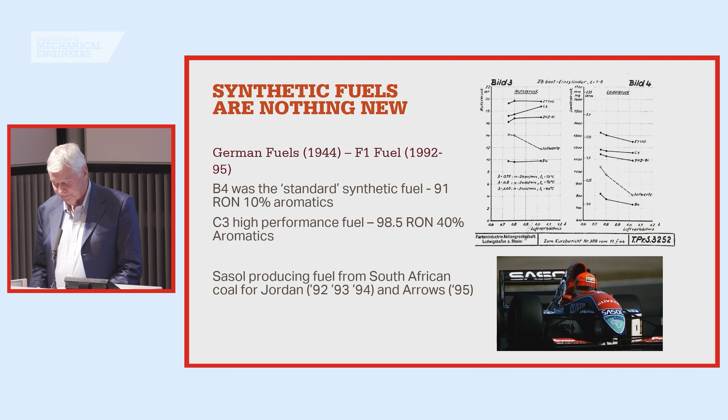Our journey, however, started with a different agenda. I joined Formula One, the commercial rights holder of the sport, in 2017. We examined many aspects that Formula One needed for a healthy future. One of these was sustainability, and I suggested that we could both enhance our image and make a real contribution to society if we developed and used sustainable fuels in Formula One.

As a mechanical engineer, I needed to revise and extend my school chemistry, but the more I got into the subject, the more I realised that this could be a viable parallel path to light vehicle electrification. So in 2018, we put together these high-level objectives for a sustainable fuel project.

Fortuitously, to the end of 2018, we started talking to Aramco about a future partnership, and this actually came about in 2019 and helped greatly with our project. So let's look at these 5 objectives individually.

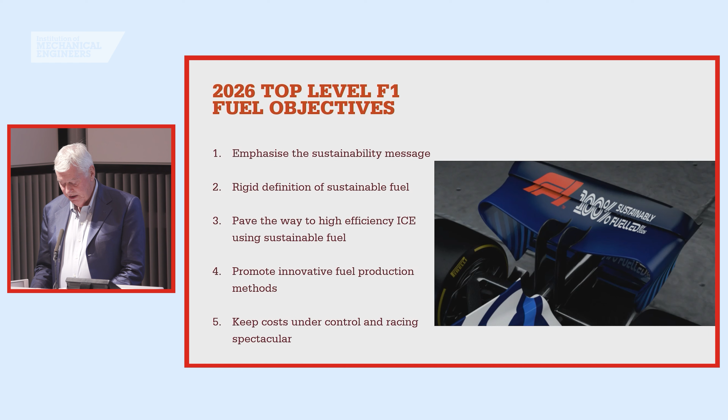We wanted to emphasise the sustainability message, and by this time people were starting to talk about sustainable fuels in motorsport. I think that when I started, very few people understood exactly what a sustainable fuel was, and I'd probably include myself in that. There was a lot of confusion, a lot of different terminology, and certainly there was some bad press about early generation biofuels.

I was determined that if we were going to introduce sustainable fuels into Formula One, we had to do it correctly. That meant having full traceability and, of course, an available supply of sustainable molecules from which to synthesize the fuel. Early on, we could see that this was going to be difficult, and indeed now, when we're just over a year away from racing the fuel, there's still not an abundant supply.

This was yet another reason not to rush into an early introduction of a product that would not stand up to scrutiny, and led us to conclude that an introduction in 2026 with a new power unit was the best way forward.

In order to avoid accusations of greenwashing, it was important that our fuel really stretched the boundaries of possibility when it came to making a truly sustainable fuel.

For this reason, I was adamant that we didn't introduce shortcuts like co-processing, which, even if it might ultimately be a good route to volume production, did not really push the oil companies to show the true potential of maximum carbon reduction. Even when it came to the denaturing of the ethanol in the fuel, I was insistent this was done in a sustainable method, much to the chagrin but the ultimate acceptance of the oil companies.

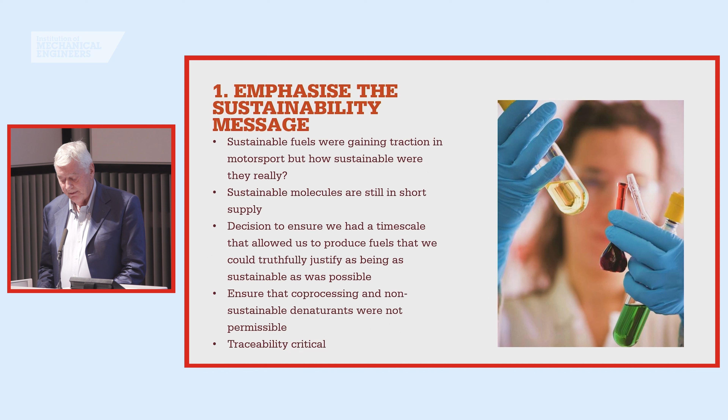With the confusing semantics surrounding the defining of non-fossil fuels, it was really important that we had a rigid definition of what we meant by sustainable fuel, and this slide shows where we ended up. Now, I don't expect you to read all 229 words of it, but it is available on the FIA website as part of the 2026 technical regulations.

The regulations are intended to ensure that the fuel comprises solely of advanced sustainable components, and that they in turn are composed of certified compounds and refinery streams. The final blended fuel must achieve a greenhouse gas emission saving relative to fossil-derived fuels of at least that defined in the transport sector of the EU Renewable Energy Directive.

In practice, we expect the GHG savings to be much greater than this. The GHG saving calculation takes into account any net carbon emissions from land use change, the energy used in harvesting and transporting the biomass, and the production and processing of the advanced sustainable component. In any process where sustainable energy is used, this must be surplus to local domestic requirements.

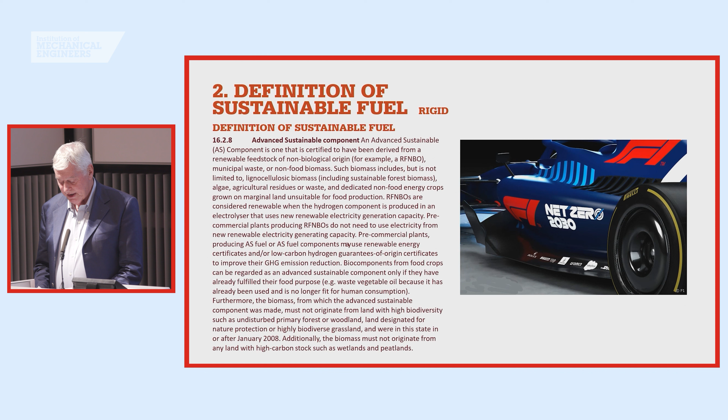I think we did a pretty good job, and I think in 2026 we can say with our hand on our hearts that the fuel in use in Formula One is as sustainable as the technology and the supply chain will allow.

Our third objective is interesting in that it's the one aspect where we changed direction after the project started. Initially, I was very keen to show what could be done with a synthetic fuel if we co-optimised the fuel and the engine together. This would open many possibilities, not least of which would be extreme compression ratios and cylinder pressures with high attendant thermal efficiencies.

As you'll know, even with a sophisticated combustion system on the current Formula One engines, performance is limited by knock. I felt we could lift this limitation significantly through a co-optimization process. After all, if you're going to synthesize a fuel with an open toolbox of molecular components, there's no need to just copy fossil-based fuels. However, as the project progressed and we involved the fuel companies more and more, and indeed our communications people in Formula One, it became apparent that demonstrating the use of a synthesized drop-in fuel would be much more useful, and at this stage, a better message.

We therefore decided that the 2026 Formula One fuel should be an EN228 type fuel, equally capable of running in a Formula One engine or any one of the 1.4 billion internal combustion engine cars there will be on the road by 2030.

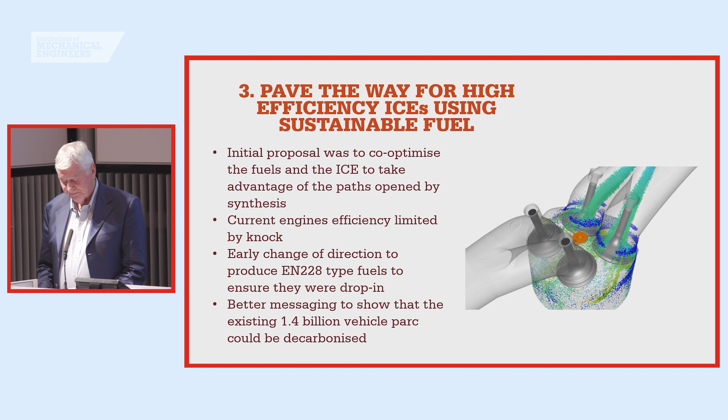Our fourth objective was to ensure that we didn't limit the technology used to make the fuel. I was very aware that European governments had dictated that the solution to CO2 reduction mandated the adoption of electric vehicles, rather than seeking the opinion of those who may have proposed alternative or at least parallel solutions. It was important that we didn't make the same mistake, and in fact encourage competition to produce a closely specified final product in the most efficient way possible.

You'll have seen many diagrams like the one before you showing the many paths to the various forms of energy carriers. Even this simple diagram can have many subsets, and between ourselves and the FIA we produced a diagram much more complex than the one on the screen, and then tried hard to ensure that we hadn't unintentionally closed off any promising path. While it's difficult to quote as an efficiency, nature is really great, even if somewhat slow, at taking CO2 out of the air, taking the carbon to grow a plant and releasing the oxygen.

If you look at the history of synthetic fuel production, you see many different efficiencies quoted in terms of EROI, or energy return on investment, from 62% for direct liquefaction of coal to 42% for biomass to liquid. ExxonMobil quote greater than 80% for fossil gasoline. If we're ever to approach this figure, we need not just an abundance of surplus renewable electricity, but also, and very importantly, the freedom of process to find the best solution.

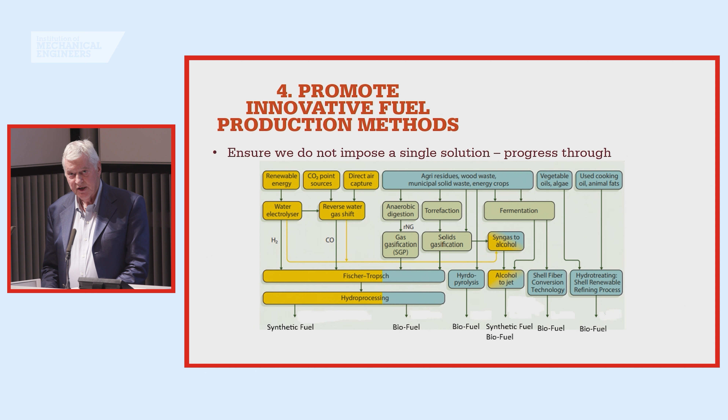Now, much of what we talked about so far is philanthropic, but we must never forget that the mission statement of Formula One is to produce the greatest racing spectacle on the planet. We couldn't afford for the introduction of the new fuel to raise costs by a prohibitive amount, or more importantly, to allow one supplier and engine manufacturer to gain the dominant position, thereby ruining the concept of close racing.

The cost question was difficult, as Formula One fuels are already blended in laboratory conditions, and they are therefore relatively costly. But the introduction of sustainable fuels had the potential to increase those costs significantly in the short term. One mitigation was to increase the oxygen limit in the fuel to around 7% by weight, which is roughly equivalent to E20. The fact that 20% of the volume of the fuel could now be a relatively cheap component, like ethanol, would assist in controlling the final price.

The current cost of a barrel, which is 159 litres, of Brent crude is $70. Once that's refined, it equates to around $99 for a barrel of gasoline. Aramco estimate the current cost of a barrel of synthetic gasoline, made using carbon capture technology, is around $250 a barrel, so there's still some way to go.

The need to keep the racing competitive and not detract from all that we achieved from the 2022 regulations required a more innovative approach. In fact, one as radical as the original mass flow limit that was introduced in 2014.

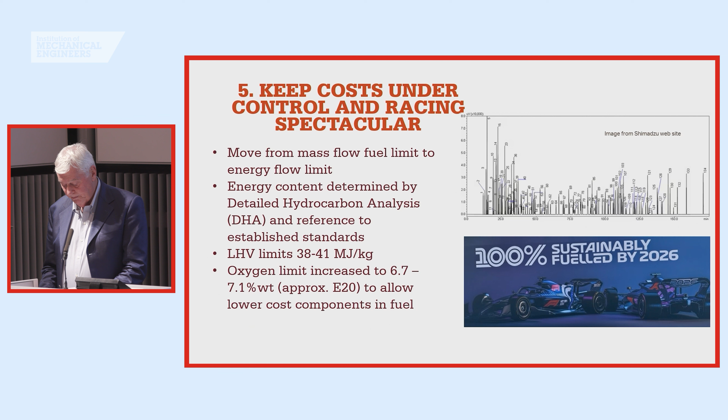So I hope this brief introduction to the thinking behind the 2026 Formula One fuel will have shown you that this is a very serious project that I and my colleagues truly believe in. We've been acutely aware that we may be accused of greenwashing, and therefore our approach has been rigorous. I also truly believe that by bringing to public attention the fact that internal combustion engines can run on fuels that ultimately could add no or at least minimal CO2 to the atmosphere provides a pragmatic approach to retaining the freedom that personal mobility gives us while limiting the damage to the planet.

So I'll now hand you over to Paddy, who will discuss the process by which his company is producing a very impressive sustainable fuel.

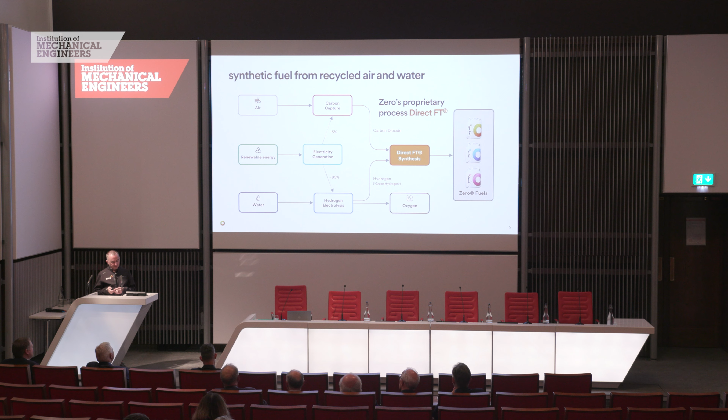Just a reminder, what is a synthetic fuel? This is how we would draw the recipe, but effectively, if we start from the bottom, we're making green hydrogen from water using renewable electricity. So you'll have heard of green hydrogen. Actually, the vast bulk of the energy is going into that hydrogen, so it has to be renewable, can be of any type.

The molecule then, hydrogen, we call that the energy molecule, and what it lacks is utility. Hydrogen, very, very difficult material. Interestingly, it doesn't exist in biology in its raw form, so I think there's some significance in that. It's a very, very dangerous and low-density gas.

But a great energy carrier. And when we bring in carbon on the top row, we turn that molecule into something that we can store and pipe and deliver, and it has very high density. The only energy format that has a higher density than that, really, that's around us would be uranium for nuclear fission. So we're in a really good spot. And again, we see that in biology with all the hydrocarbons that are in use in plants and animals.

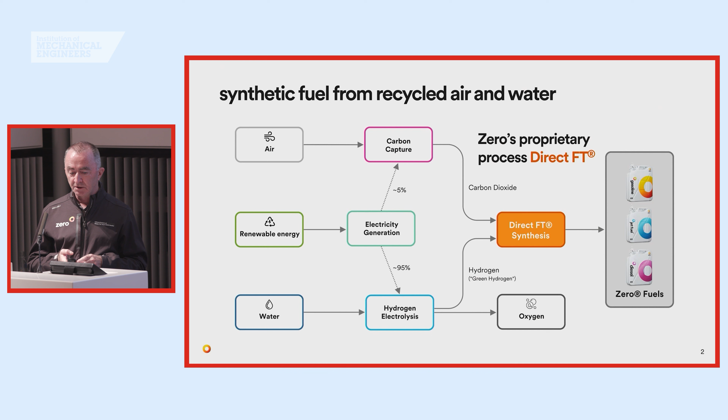And what we do is bring that together in the synthesis. In our case with Zero, our particular version of Fischer-Tropsch, which Pat mentioned is 100 years old, we call direct Fischer-Tropsch. The reason essentially is that we are able to make a refinery grade fuel directly from our process. We don't have to go via any further downstream refining or blending process. So we can make directly a gasoline or a jet fuel or a diesel according to our choice - a refinery grade set of molecules.

And just a reminder, what are the real points of synthetic fuels? I will distinguish here from a biofuel. Biofuel comes effectively from agricultural feedstocks - it's an agricultural product, whether it's direct, like a sugar making alcohol in Brazil for many, many years, or a second generation, as is dictated in the Formula One regulations, which comes from the waste of a crop. Nevertheless, it's a limited feedstock and not one which will get cheaper.

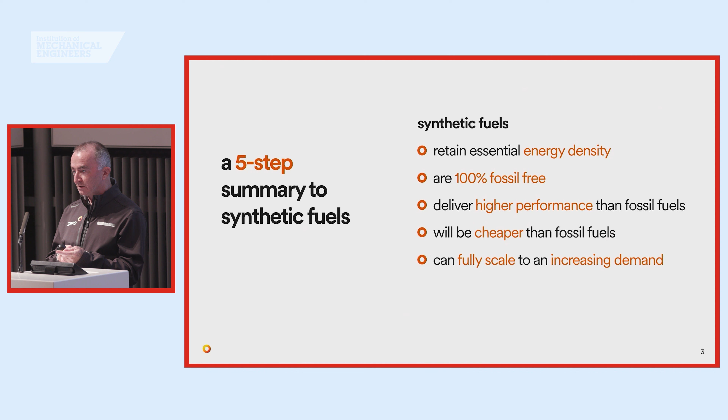So we look here at where a synthetic comes in, which is an entirely industrially made fuel. If you look at the recipe before, all of that is machinery. There is no feedstock other than air and water, which are around in the immediate environment. So we keep the energy density of the regular hydrocarbons. We're 100% fossil-free. We can eventually make fuels, in fact we already do, that are better than the fossil equivalents. They will be cheaper, and I'll come on to that. And they can scale to all necessary demand within our current industrial civilization.

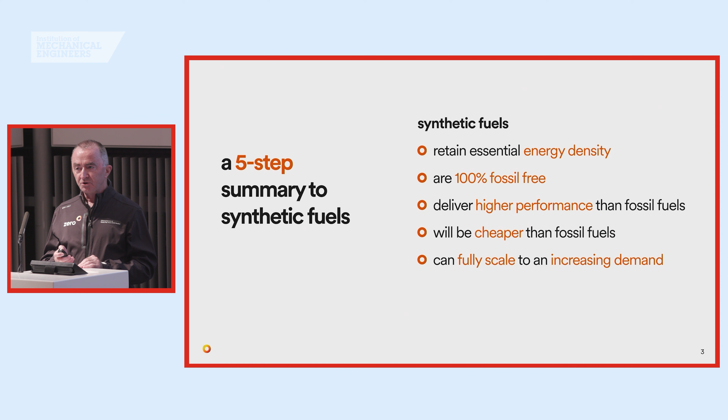So these are all critical components of synthetic fuels, and why we believe in Zero, this is the future to transform our entire industrial society.

Just a quick point on energy density. We have a lot of talk about electrification and how great electric cars are. I do like electric cars, by the way, but energy density is a very, very critical parameter, particularly in mobility. Aircraft being the most obvious example, but even if you go to marine, shipping, and anything in between - density is a killer if it's low. You're effectively taking profit because you're taking payload.

And that may be less true of your personal transport, but it's true in almost all other vehicles. And the number there, a lithium battery would be 50 times lower energy density than an equivalent hydrocarbon liquid. And hydrogen sits somewhere in the middle, depending on the containment, but it will be at least 5 times heavier. And volume is another factor, by the way, not even mentioned, but again, very relevant in an aircraft, for instance.

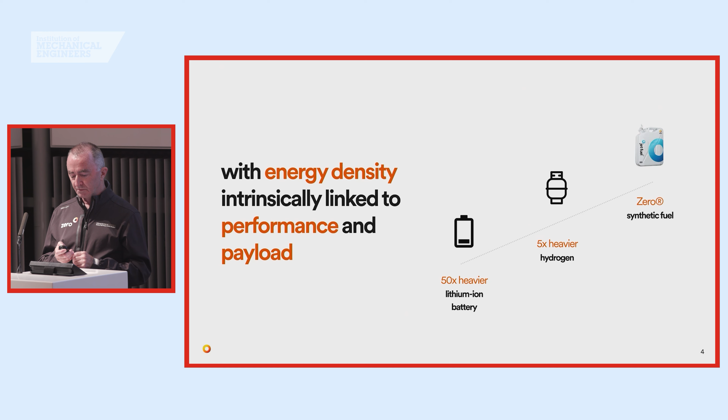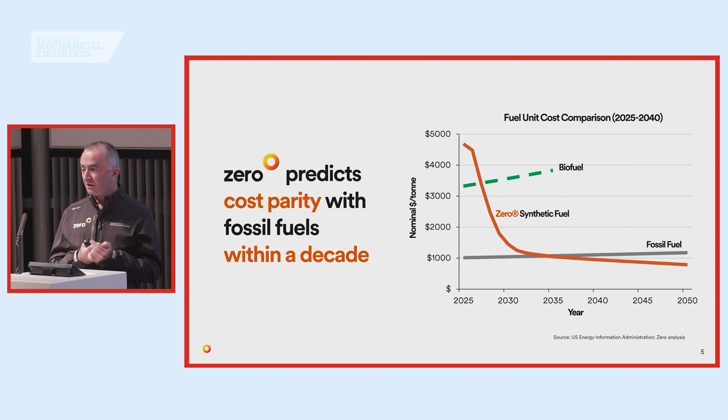The cheapest power station you can build in most parts of the world now will be a solar or wind generation station, not a fossil fuel station. So we predict to get parity inside 10 years, and we think that will be a real game changer in all manner of effects.

Honestly, I believe in 10, 20 years we'll face the choice, just like we've seen in wind and solar. Do I go and explore for new oil in a new offshore license? It will be 30 years before I monetize that oil, during which I'm sinking huge capital into a pit. Or will I go and build a synthetic fuel plant where I know I can have the fuel inside 2 years and it will be cheaper and better? I think that's a clear choice.

And that is where the world will move. I hope you may recall me saying that when it comes to pass. So we think it's a really exciting point.

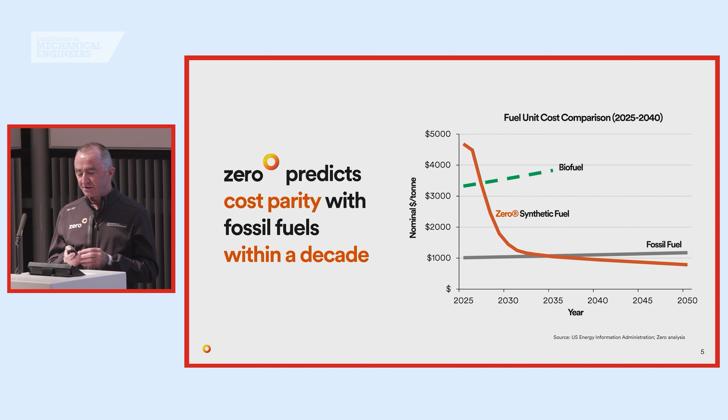And the last point is around scale. I know somebody already asked me that downstairs. If you want some simple numbers: 6% of Australia's land area, which is far less than the degree that is uninhabitable, as a solar farm, would make all the fossil fuel we use today on Earth as synthetic. So that just gives you an idea. It's a big amount of land, a big solar farm, but that's absolutely viable.

And we won't see a reduction in the need for liquid fuels. We will see an increase. More people want to fly, more people want a higher standard of living, and they're going to get it. We just need to do it properly. So it is actually a capital challenge, this. We know how to do it. We just have to go and invest and build it.

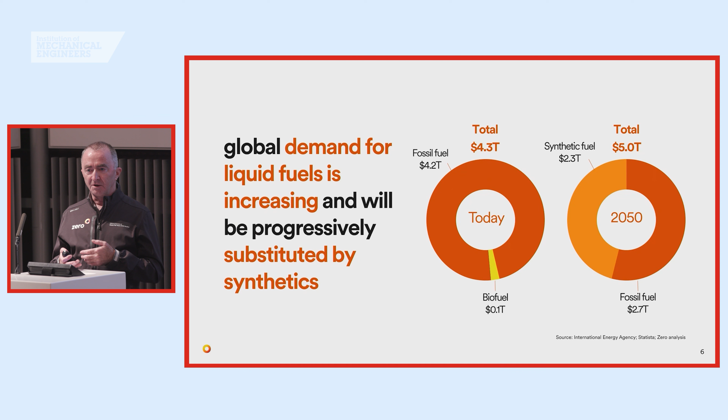We effectively have to replace the entire upstream of the oil industry with synthetic plant.

Just a quick one, what do we do at Zero? We're Formula One people, actually. We have a very Formula One mindset about how we develop. So it's not just me, there are about 20%, we're 60 people now, 20% of us come from Formula One. So we bring that spirit to what we're doing.

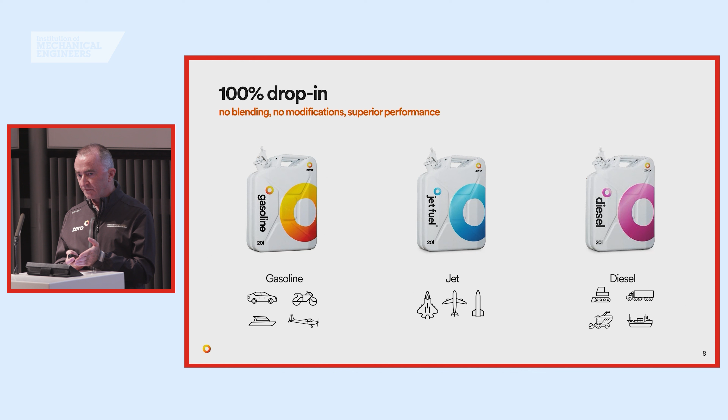We make, as I said, drop-in versions of the 3 major fuels, very high quality. To give the gasoline example, we ran just 2 weeks ago a back-to-back on a dynamometer of an EN228 gasoline at RON 98, comparing to a standard RON 98 ethanol-free, which is actually an Australian grade. And we had more power on the dyno without any adjustment whatsoever. So that's the standard of gasoline we've reached straight out of our process without any blending or downstream processing.

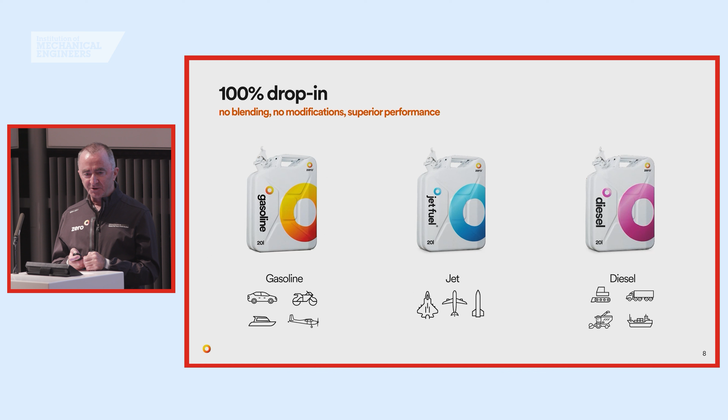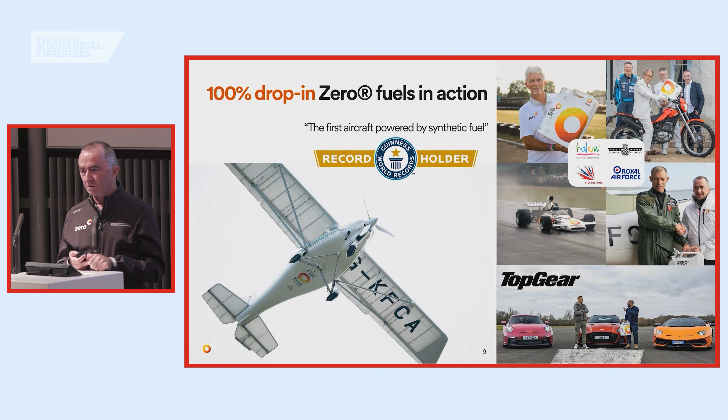We can also make a replica of Jet A1, which is a very sought-after set of molecules. Most of the sustainable aviation fuels that you see will only reach a 50% blend limit because they don't have the right molecules. And we've run lots of engines. I'm not going to go through all of them, but I think most interesting, we ran that McLaren, Cosworth-powered, in the historic sessions at the British Grand Prix on our gasoline, straight drop-in. Worked perfectly.

This is just showing our technology. I'm not going to delve into the detail, but essentially the point is that we can make jet, diesel, or gasoline with effectively the same equipment. So it gives us tremendous flexibility.

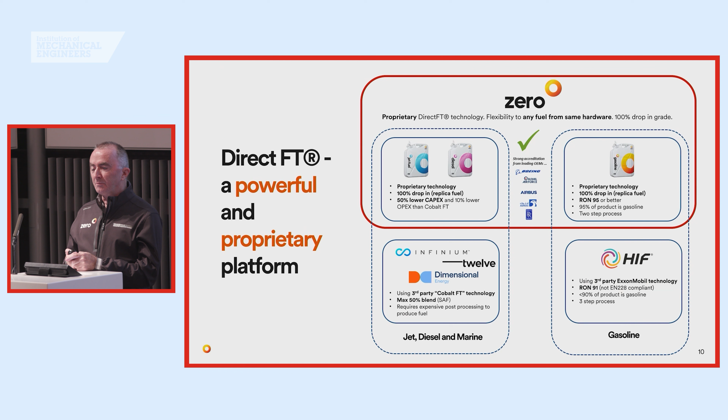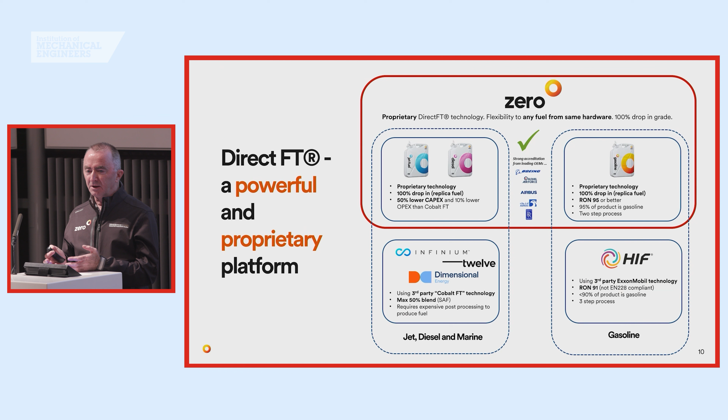And I think if I go into the gasoline, we're very proud of the platform in the sense of being able to make not only, say, an EN228 replica, but also some of the fuels that Pat talked about, these high-performance fuels, let's call them designer gasolines. So the future of chemistry in this sector is incredibly exciting because these are completely designed fuels. Every molecule is designed. We're not dealing with what we happen to dig up from underground. Fully engineered fuels.

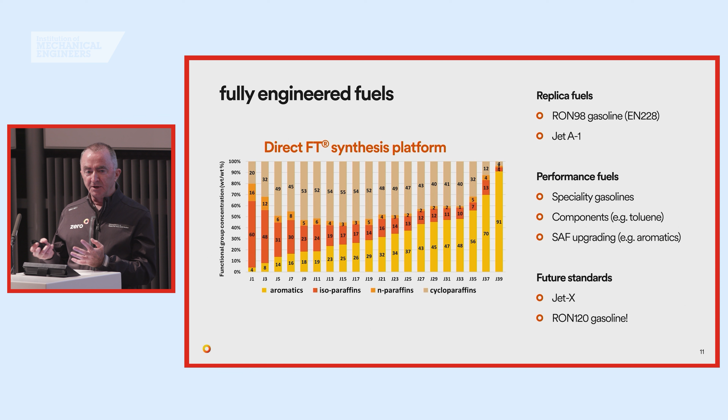I'll just give an example there. Shown across, these are the range of the 4 primary molecules within a gasoline, for instance: the paraffins, isoparaffins, these are chains or chains with branches, and then we move into circles with cycloparaffins, and then the unsaturated aromatics, which are based on, like, a benzene or onwards. And with our process, we can make all these different mixes between the two, which really emphasizes the point I was making around the tailoring that's possible with chemistry.

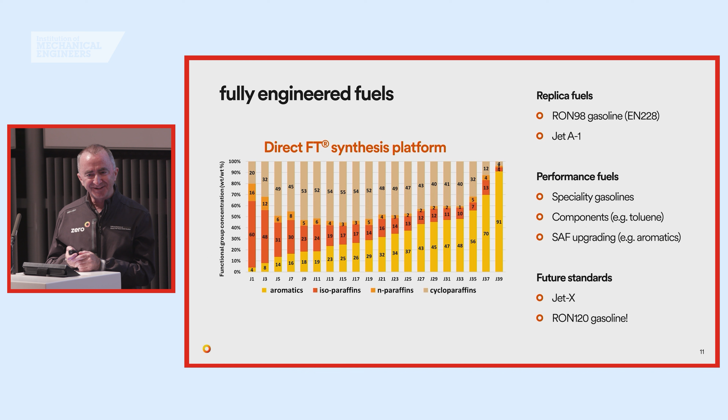Effectively, we're gluing hydrogen and carbon together in any way we wish, and that's a tremendously powerful and exciting opportunity, particularly as we move into the subject of motor racing, which is where we're headed. I've given you a lot of background there. I need to bring it back to motor racing, and I'll do that in a minute.

But just showing where we are, we're currently making 3 litres a day in our plant in Bicester, not the shopping end of town.

We'll be moving to about 40 litres a day in about 4 or 5 months within our building, then we start moving outside the building up to 500 litres a day in the second quarter of next year, and onwards from there to eventually very, very large scales. So that's our journey at the moment.

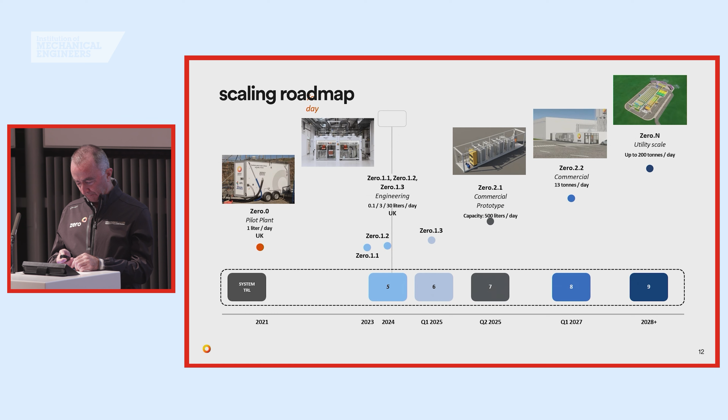This is where we're at today. The main picture in the middle is our currently running line, or train, as we call it—the 3 litre a day train—and we'll be building towards the camera the larger 30-40 litre plant. We've made the place look very attractive because we see this as a showcase for this exciting new space.

One of our team was down at Brooklands today talking. I think they said there were several hundred kids. This was organised by the RAF to introduce them to this subject, and it was, they said, incredibly exciting how excited the kids were about this sort of notion.

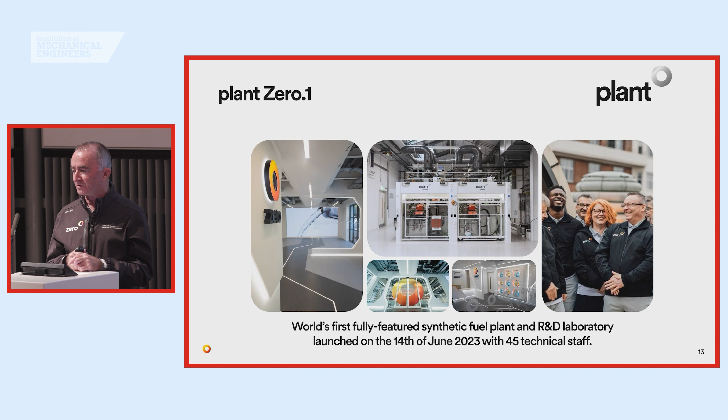We find that we feel like evangelists because most people we meet have never heard of synthetic fuels. They have no idea you can make fuel rather than only dig it up out of the ground.

So my last two slides, I hope I'm not squeezing Hal too much. Just, how do we bootstrap this industry? Because like anything new, initial cost is a challenge.

In aviation, we get great political support. Aviation is the bad guy in the world. Everybody should stop flying, apparently. It's a sin. Obviously they won't, but it does mean it gets a lot of political support around moving into sustainable fuels.

Interestingly, there is great recognition now in aviation that eSAF, which is technically what we call an electrically generated sustainable aviation fuel—that is to say, a synthetic—is the pathway to scale and to low cost. That is now recognised. A year ago, it wasn't.

A year before that, they wanted to build hydrogen aircraft. A year before that, they wanted to build electric aeroplanes. They've finally started to understand, which is really great news, that this is the answer.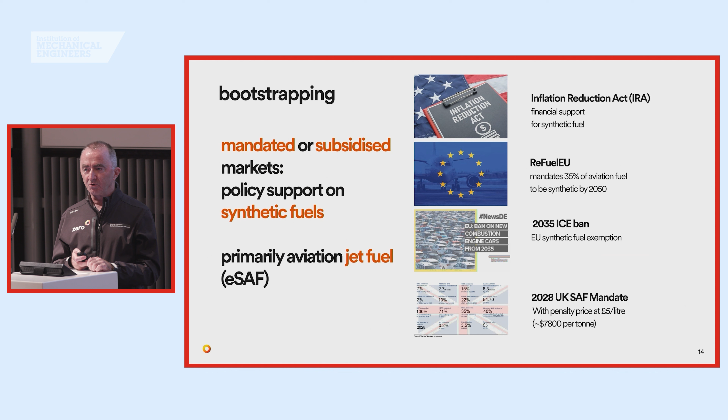Governments are now providing very strong subsidies. The UK are mandating synthetic aviation fuel from 2028, as a small blend, but with tremendous price support. So that's a really good manoeuvre. And we see the same across all of Europe—that's good for aviation fuel.

In terms of gasoline, it's slightly more difficult because you're supposed to electrify all your cars according to government. So they're not really giving much price support or mandates. So we're relying a lot more on voluntary markets—people who will be willing to pay more to do the right thing.

That can be corporations as well as individuals, so high net worths with their expensive cars, or, as an example, Formula One or other motor racing series, or events with classic cars and so on. We're seeing that's where the initial support will come in terms of premiums—people who are less price sensitive than what you'd expect on the regular forecourt.

This will be a tremendously important market, and that's why we're so keen to work in motorsport, which hooks me back into why we're here this evening. Motorsport will be a critical component of bringing this technology into circulation, bootstrapping us onto that cost curve where we'll adopt it and bring it towards widespread use and eventually cost equivalence with fossil fuels. That journey will start in motorsport, even perhaps earlier than aviation.

Hello, everyone. It's an absolute privilege to be here, and a wonderful thing to be speaking after these two great engineers, motorsports legends, these guys, and somehow I've managed to find my way up the stage after them. So that doesn't sound like me, what was just described.

I think I am most proud, actually, that I've been at Mercedes for 20 years, and I am still at heart an oily power unit engineer. Loved being part of that. Those early days of trying to get V10s and V8s to run at 20,000 RPM and keep the valve train together. That was great fun. Anyway, it's a privilege to be here. Won't go on too much about that stuff.

Let's talk about sustainable fuels. That's our factory. Grown a lot over the years, and we've developed a lot since 2004 when I joined, and we were then an engine company called High Performance Engines at various times, but it's truly a power unit company now. A lot more electrification, battery packs, motors, power electronics, and I think this journey in sustainable fuel is another obvious step for us to take in developing something that really can make a difference to the world.

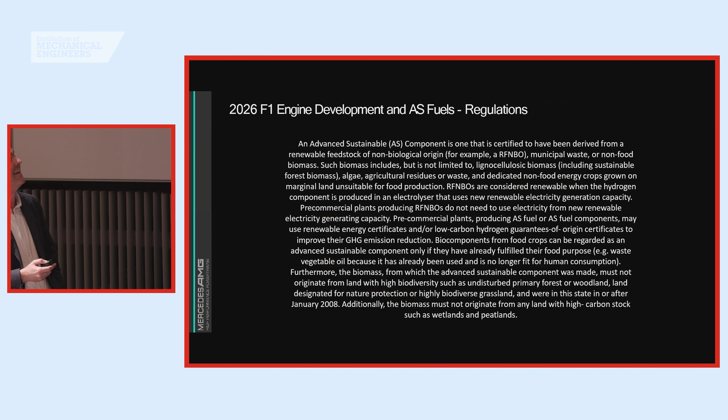Here's the same wording that got put up earlier. How many words did you say there were? Too many.

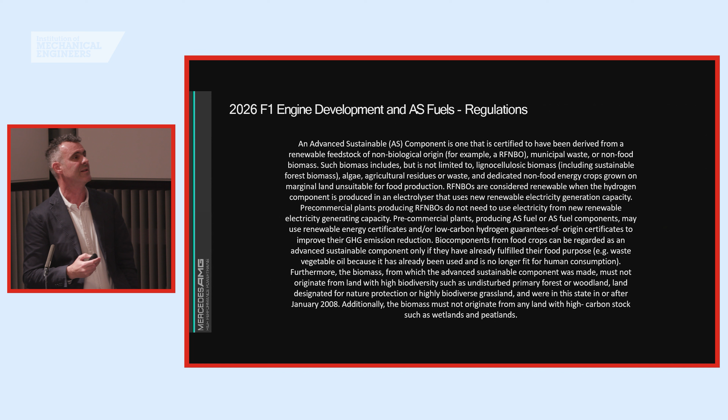The very start of the 2026 project, it was always going to be about 100% sustainable fuel, as you said. It was one of the key aspects. And as has been said by others previously, I didn't know what sustainable fuel was. Didn't have a clue.

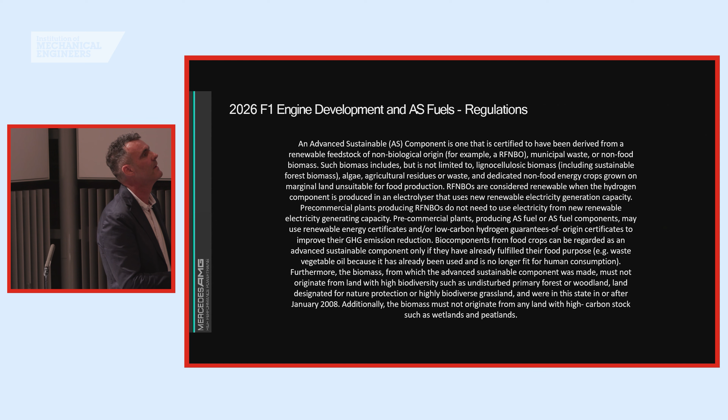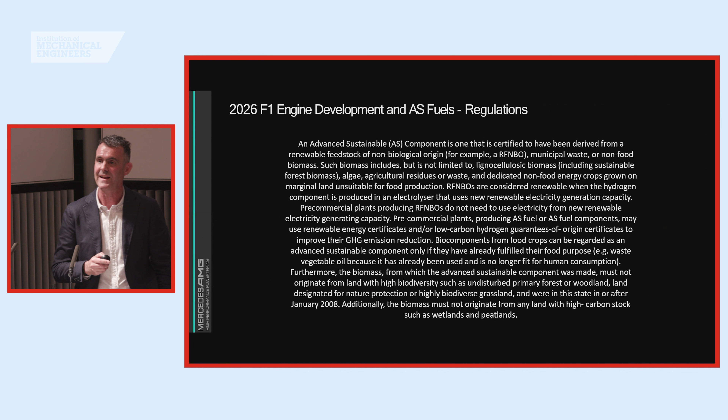Fortunately, this has been put together. Unlike previously, go on, read it. It's a long piece of wording, but it has to be. It's very clear, and actually, what Pat said is absolutely true. Formula One engineers, most engineers really, if you give them a regulation, the first thing they try and find is a loophole. They're Harry Houdinis, and we've got some of the best. So we absolutely have to have a very clear definition, otherwise we'll be trampling all over it, and I think that one's pretty decent.

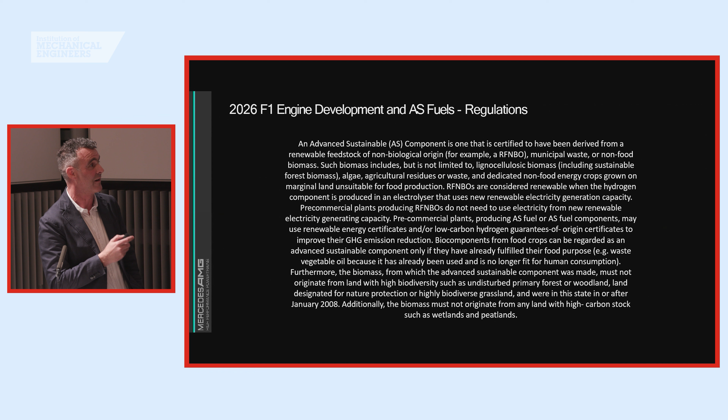But when people ask me what does it really mean, I go for that: no dinosaurs have been hurt in the making of this fuel, and that does it for most people. They kind of understand what we mean then. But I think what was also done with the regulations - I feel like I'm tipping my hat too often in this direction - it wasn't about saying what we had to do. It wasn't saying it had to be an e-fuel. It wasn't saying it had to be a biomass fuel. There was a lot of, although that wording is quite a lot of words, there's a lot of different ways you can go about it. And I think that's pretty canny, because it's like you say, it's about the outcome. The outcome's no dinosaurs get hurt. But actually, it gave us the option and different ways of approaching the problem.

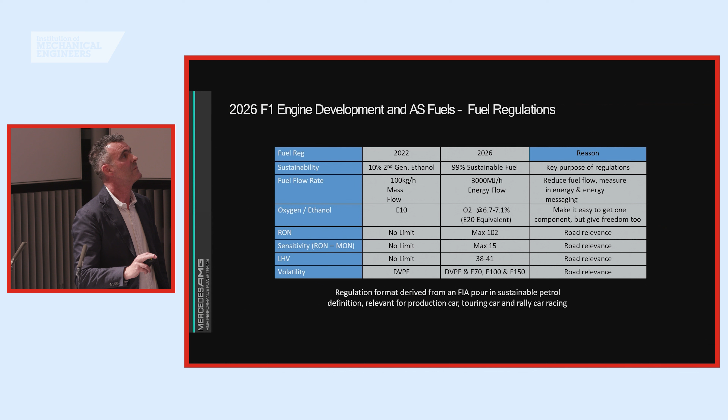The energy flow that was mentioned earlier, we're transferring to that, and the E10 becoming probably an E20. You can use different oxygen if you want, but probably an E20. And as we said earlier, it makes it easy to get one of the components, basically, and cuts down the costs. But it still gave us some freedom, because it could have just been an E20. And then we look at some of the other specifications of the fuel that we just didn't have previously in F1. So there's a maximum RON limit, there's a sensitivity limit, there's an LHV limit, and the volatility is far more tied down.

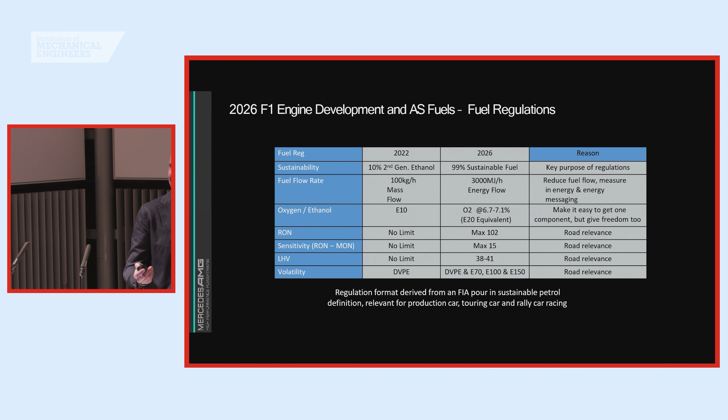What that was all about is road relevance. The regulation format was derived from an FIA pour in sustainable petrol, so really it should be a sustainable pour in petrol. The RON is a bit high, and the ethanol is probably a bit more than you'd have, but they're all completely doable things to get it into something you can just pour in. So that's where we got to with the regulations.

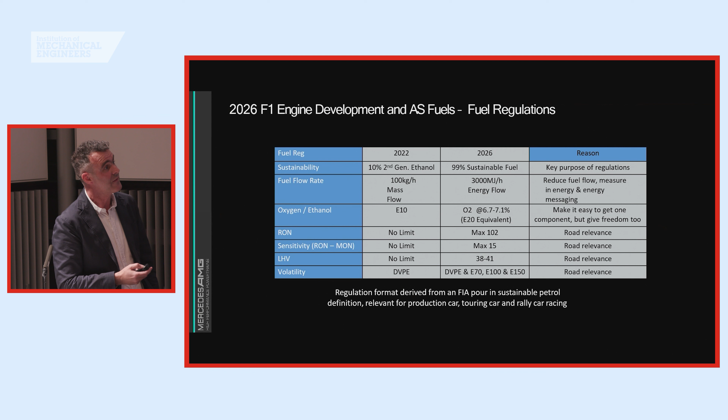As I said, I'm only a power unit manufacturer, not a fuel producer. What we're trying to do is make a power unit with the most performance. That means we need to think about the fuel we're creating with our partner, in our case Petronas, in complete combination with what the power unit's going to do, and what the regulations are for the power unit. So we couldn't really develop the power unit, or the fuel, without real thought about the other combustion parameters in the engine.

There's quite a number of them that have changed. As has been said previously, there's a reduction in the amount of fuel being run, about 75%, something like that. That's a regulation fundamental. The compression ratio is going down - not something we're particular fans of, I must admit, but there we are. That's about road relevance and simplification.

One of the big things about the new regulations was we wanted to get some new players into the sport, which was successfully done, but they were very keen on making sure the compression ratio was a sensible number, more in line with road cars.

We've got a boost pressure limit imposed upon us. I've got a pound bet - no, a pint, it's a pint, isn't it - I've got a pint of beer bet. Pat doesn't think we'll get anywhere near it. I'm not so sure, but we'll have to see where we get to in that first race.

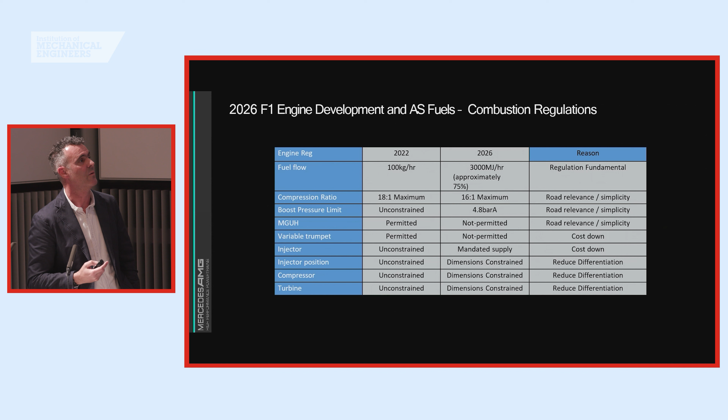So that's the fuel regulations and the combustion engine regulations, particularly the combustion part of the regulations we're working with, and we need to make that fuel and the PU sing together.

Here's some fuel basics. I worry about this next couple of slides because I'm no fuel person, but if I look at the difference between pump fuel and F1 fuel, I think the main basis of pump fuel is the cost. That's what people are talking about, that's what people are working on. There's a lot of constraint on it - volatility, RON, sensitivity - the sort of things we've now added to the '26 fuel. But basically, the cheaper you can make it, the less refined you can make it, the better it is. That's why you end up with a fuel that has probably got greater than 150 components in it.

If I look at current F1 fuels, and this is the current situation I've got on this slide, it's all about performance. We don't really care about the cost.

We know from long experience what components within a fuel the combustion engine likes, what it enjoys burning and what it doesn't. Because cost isn't really a limitation, all we want in the fuel are things the combustion engine loves burning. We don't want any passengers, especially with the limitation that it's only 100 kilograms an hour, so it's a volume. You don't want any of that volume made up of a passenger. So we end up with fuels made up of probably less than 10 individual components, certainly the bulk fuel.

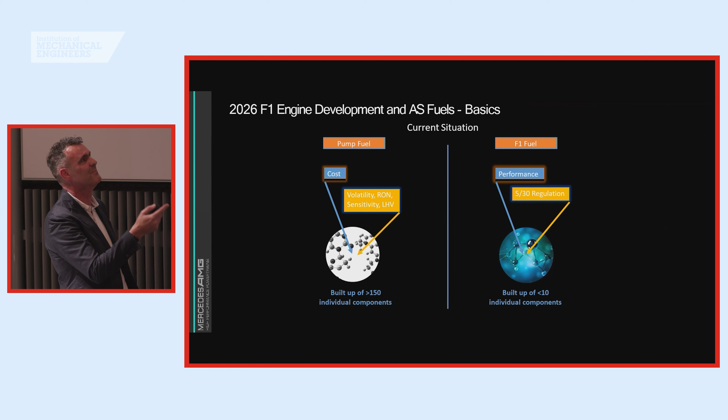There's a regulation, the 5/30 regulation, which I always get into a muddle when I try to explain. But it basically means 30% of the fuel has to be made up of components, any one of which is less than 5%. It means you're going to end up with six, seven or eight components, that sort of number. You just end up with very few components because that's what you want.

So how does that compare with sustainable fuels? When we started the project, there were sustainable fuels available, but the availability of components was actually pretty poor. The available sustainable fuels when we started were made of many components, with constraints very much about being a pump fuel. If we're honest, when we tried the performance of those fuels, it was terrible. The F1 engine didn't like that at all, again because of those passengers and the amount of refinement done on the fuel.

So what's the sustainable F1 fuel going to look like? We're far more about performance now, that's for sure, but there's still a big part about availability. These components are not as available as you would want them. You can't look at the seven or eight components we had previously and just make a fuel exactly the same. Anyway, we can't, because of the volatility rules, the RON rules, the sensitivity rules, which mean we can't get away with some of the fuels we had previously. It's put us in quite a tight box. Everyone will be desperately trying to pop out of that box to get a performance advantage, but it's quite a tight box.

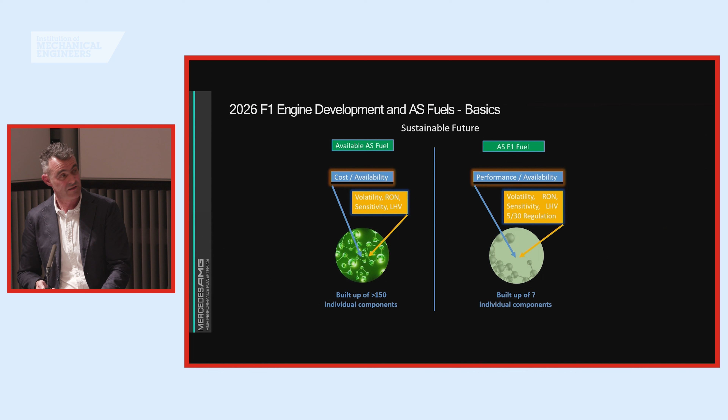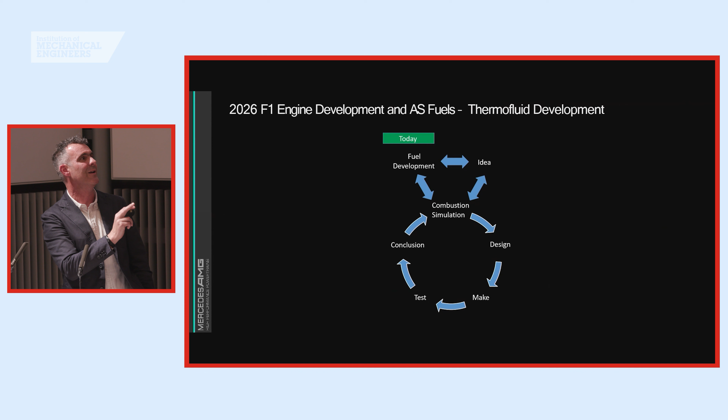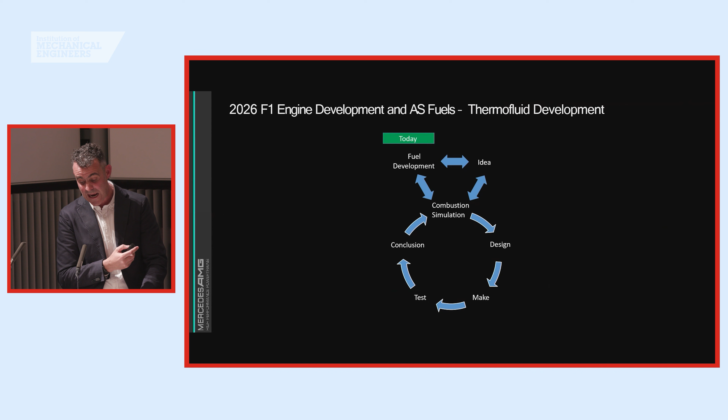Today, the development is done far more together - almost two loops now, really: the combustion development and fuel development, and the combustion simulation. Every idea we have now will go through that combustion simulation. We can plug in different molecules, different fuels, and do that work without having to go into the more time-consuming design, make, test, conclude process. Of course it's not perfect - we're not suggesting the combustion simulation is - it's a really, really difficult skill, a really difficult problem. So we'll continue to put various things through, but it's a far different world than it was 10 years ago. Being able to do this allows us to develop an awful lot quicker and get through loops an awful lot quicker, and really it's helping us understand what the available sustainable components are and how they work with the engine.

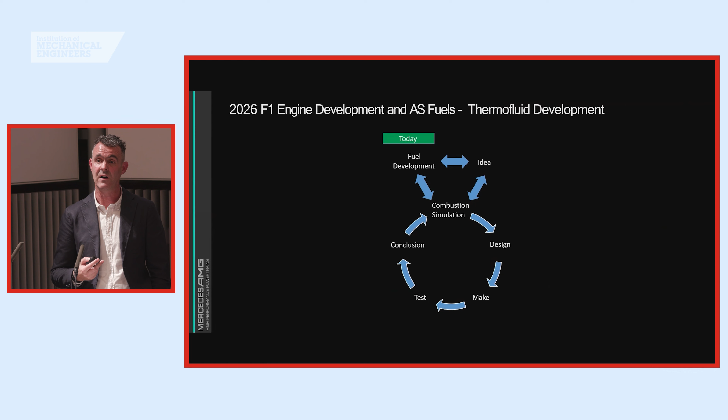I think I've been pretty swift, which is good news. Good news for everyone.

I guess the conclusion is the power unit is pretty agnostic to where the fuels come from. It doesn't care if a dinosaur's been hurt, it doesn't care where it's come from, it doesn't care if it's an e-fuel or if it's come from biomass or one of the other sources. It just cares if it makes performance. And that's what we're all about - learning about the fuel, learning about those components, and getting that to work with the engine.

As has been pointed out to me a couple of times this evening, we're only about a year away now from making engines that will go to track test for the 2026 season. So things are coming around pretty quickly. What seemed like a long time ahead of us with much time to do many iterations is really coming home pretty quickly.

And that is in all the aspects, but in particular the sustainable fuel is a big topic - how we're going to get the capacity, how we're going to get the amount of fuel that we need. So how will that all play out in 12, 18 months' time when we hit the track? I think it's in Australia, probably the first race in '26.

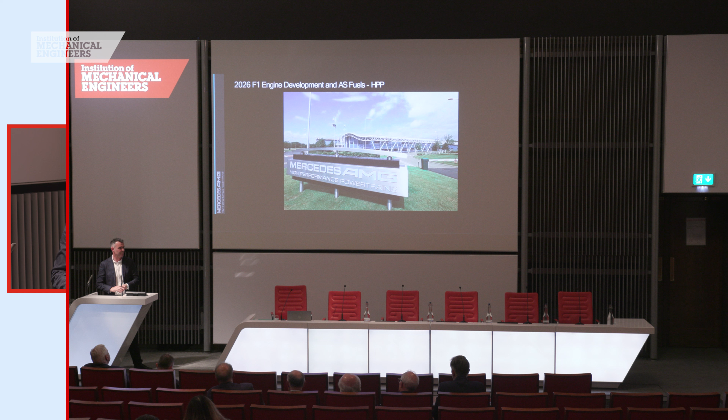The wonderful thing about sport and about motorsport is we don't know. We don't know how it's going to play out. We think we're doing okay, but there are several other factories that I'm sure think they're doing okay as well. So it's a fantastic opportunity that we've got.

The sustainable fuel makes a real difference, and if we're going to be able to show that at the highest level of motorsport you can use a sustainable fuel, then it really will be able to potentially show the world what can be done. And I think I'll leave it there.